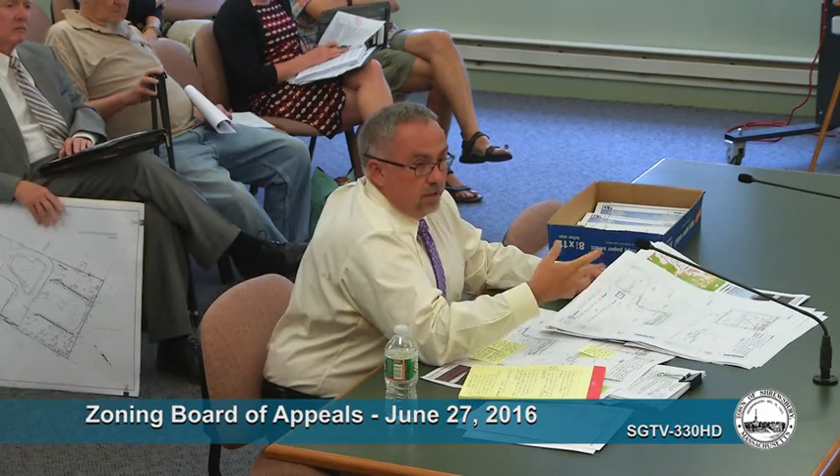So what I have done, okay with you, Mr. Chairman, I have taken out what I think are the most important documents from our application. I have pieced those together in a couple of handouts here that I can go through in 10 minutes or less, with a nice overview of the proposal. So if I may approach and distribute.

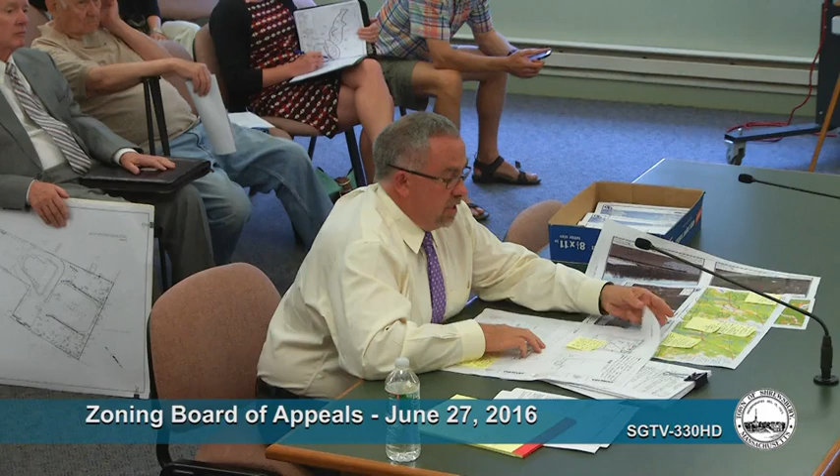You mentioned something about propane tanks? Yes, the proposed emergency backup generator would be run on an LP tank. Is there any way that could be put in the fenced-in area? It is inside, in the fenced-in area, yes. Just for safety reasons? Yep, it's in the fenced-in area, and I believe they drew the 10-foot spark radius around there for us. So, agreed.

I think an earlier set of plans may have shown that outside, and we added it to the inside. If I remember, the last time we heard this was the AT&T tower, and you co-located on that. And you'll be coming off of that? No, and I apologize if that was confusing — AT&T is currently located on top of one of those large electrical stanchion poles. I'm not here representing AT&T, but it's my understanding what they have there is a limited installation. Verizon Wireless would only be able to do a limited installation there as well, and it would not be able to provide the upgrade to 4G LTE services. So you're not on that tower now? No, we are not.

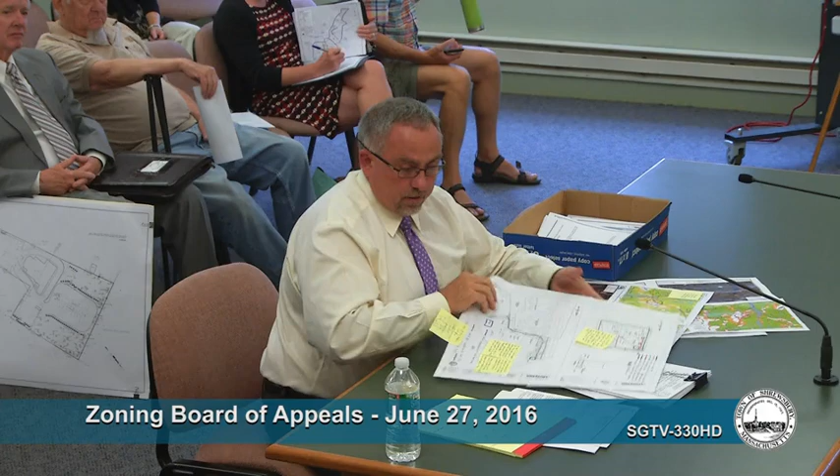How does this benefit the town of Shrewsbury, and do we derive any income from it? First, I would say it does benefit the town of Shrewsbury. As part of the RF report, it talks specifically about the number of vehicles that pass between exit 22 and Gulf Street, which is the most recent data. The most recent data from 2014 was just about 70,000 vehicles. On Main Street alone, the most recent data available, from 2001, shows about 12,000 vehicles a day.

So I think, first and foremost, the benefit is that we've identified a gap in coverage — I've passed back and forth in both directions on 290 with my Verizon Wireless phone, and it drops right when you get to those electric lines. So this benefits reliable service for residents, businesses, and public safety folks. And certainly I believe there's going to be an increase in real estate taxes that someone will pay, which would be a financial benefit to the town. So you'll be paying that? Correct. St. John's won't pay it. Correct.

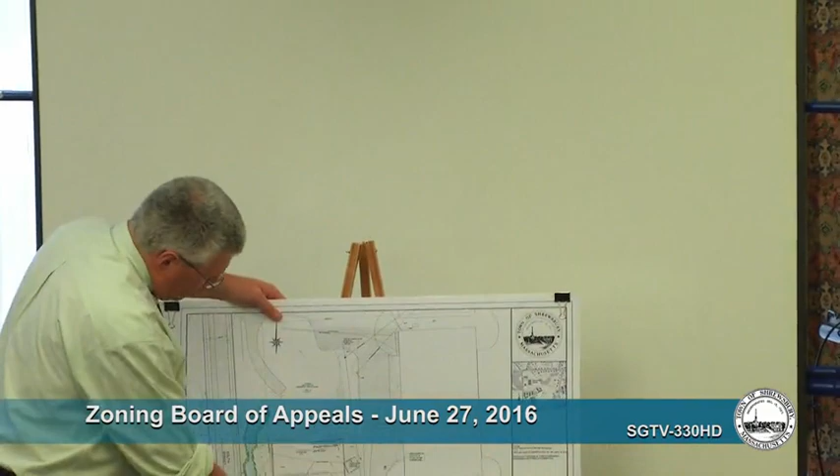The location of this proposed salt shed, shown in red, is at the existing DPW yard on South Street. The existing salt shed sits here. The proposed salt shed will sit on the existing paved area to the north of the existing salt shed, and the existing salt shed would then be torn down. We're trying to work it so that, depending on timing of construction, we can tear down the old one and build the new one in its place.

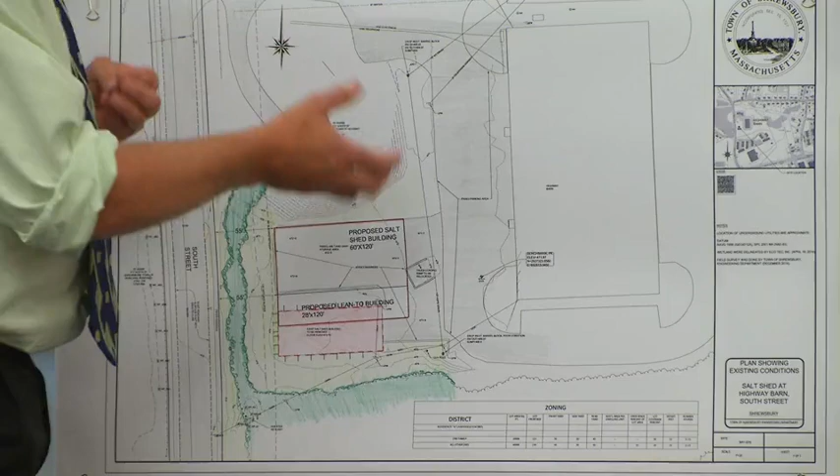If not, we'll have to build the main portion of the salt shed and then put in the overhang after the other salt shed is down. We're trying to get it constructed prior to shipment around November 1st. The shed itself will sit exactly the same distance back from South Street as it does now, except it will be further to the north.

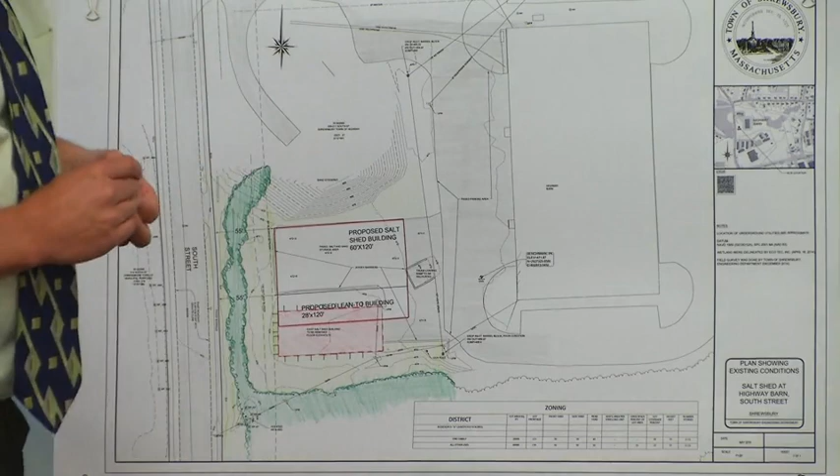Any questions? No, I'm fine with it. Does this mean that we'll actually get the salt shed? And a second part of that question, how long have we been talking about making this happen?

Oh, it's been over 10 years, I think, since we originally talked about this. If we're in place to do it, we're waiting to see what the final numbers come in. But I believe it's going to happen, because I think Dan and myself both want to get it done. So we're close now. We're close.

We actually have an architect we are working with at this point. We've got an appropriation at town meeting to study the facility, to look at the old and the new. And I know we have probably $500,000 to $600,000 set aside in Chapter 90 to fund the project.

I don't have any other questions. Good. Anyone in attendance wish to be heard on this? There being no further questions or comments, we'll take it under advisement. You'll be notified of our decision. Thank you very much.

Next is to hear the appeal of Bay State All-Star Cheer and Dance LLC, 228 Cherry Street, Shrewsbury, Mass, for a use variance to the Town of Shrewsbury zoning bylaw under Section 6, Table 1, to operate a cheer and dance place of assembly in the Limited Industrial District upon property located at 545 Hartford Turnpike. The subject premise is on the Shrewsbury Assessor's Tax Sheet 48, Plot 32.

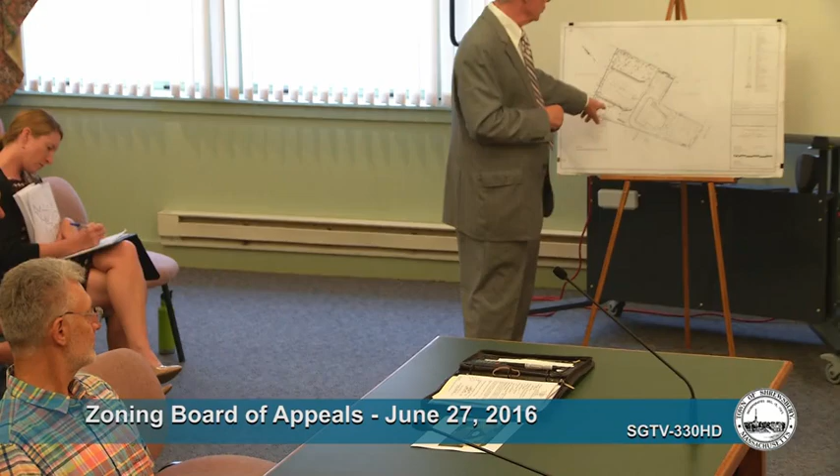Mr. Hakeem has decided, as you know, there was a bank here twice in this facility. Since the bank moved out, the unit has been vacant. His concept is for shared office space, as you can see from the signage. This lot is a fairly sizable lot in the center of Shrewsbury, somewhat of a pork chop lot.

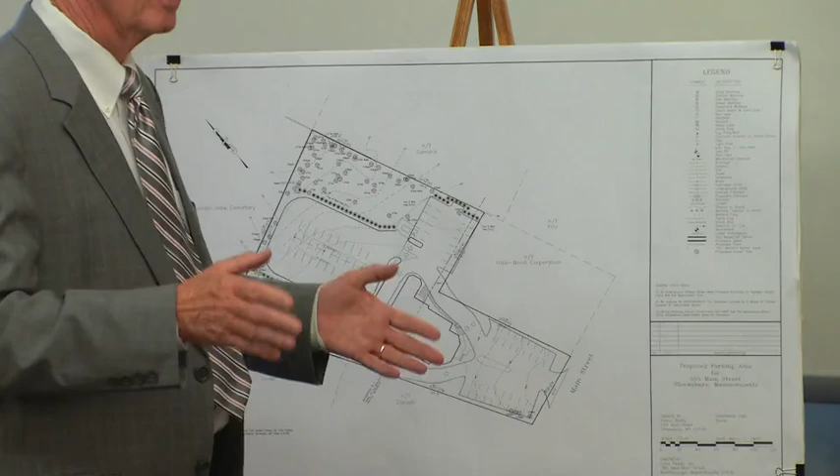It only has 83.04 feet of frontage. Because it is a sizable lot, if it were a rectangle lot, it would be allowed 223 feet of signage. But because of the amount of frontage on the lot itself, it is only specifically allowed under the bylaw 83 square feet of signage. That causes the hardship we're dealing with. The present signage at the property exceeds that amount.

This is why we're asking for the special permits, in order to allow the alteration of the signage that's there. In addition to the alteration, we are also looking for alteration of the roof sign to go from the rectangle presently, which is 24 square feet, up to 32 feet by use of an oval sign.

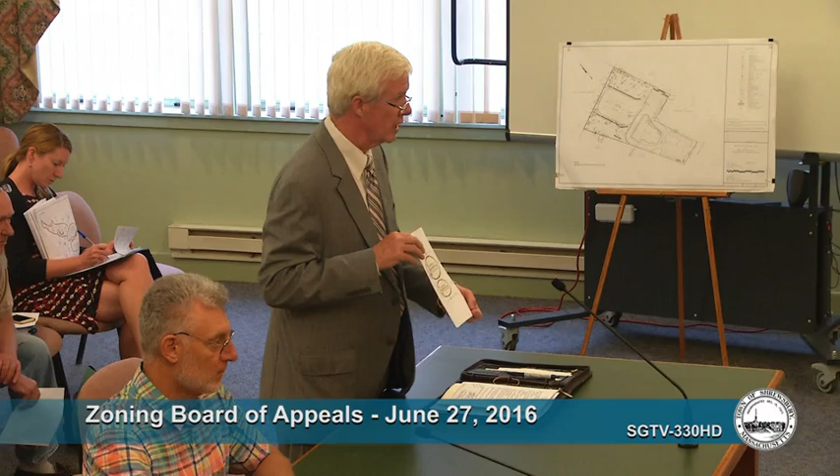If you look at page 2 of the handout I've given you, you'll see that if we stayed with the 24-foot rectangular configuration, that sign would be substantially smaller than what we believe is necessary in order to be read from the parking lot and as you enter the parking lot from the street. So that's the reason for that increase.

I've worked with the building inspector to figure out that square footage. I'm not a math major, so we came up with the fact that this request is for a 32 square foot sign based on the oval.

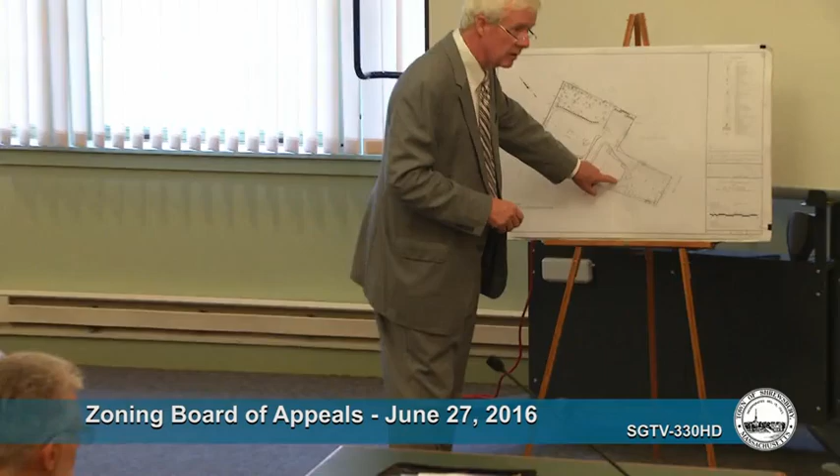In addition, because of the shared office space concept, we're looking to be able to put the names of specific tenants on the awnings themselves, on just the lip of the awnings. That comprises totally 28 square feet. Those awnings would be on the front and side portions of the front unit of the building, which is the unit we're talking about for this concept of shared office space.

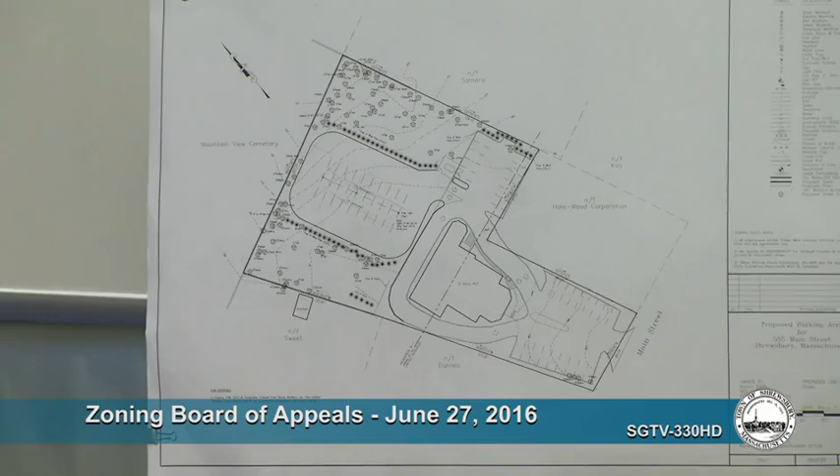So the total square footage we would be looking for is basically about a 32-foot increase overall on this property. The total square footage would be 130 square feet of signage, and that's for all the signs, including the street sign that's out there, the awning signs, and the oval roof sign.

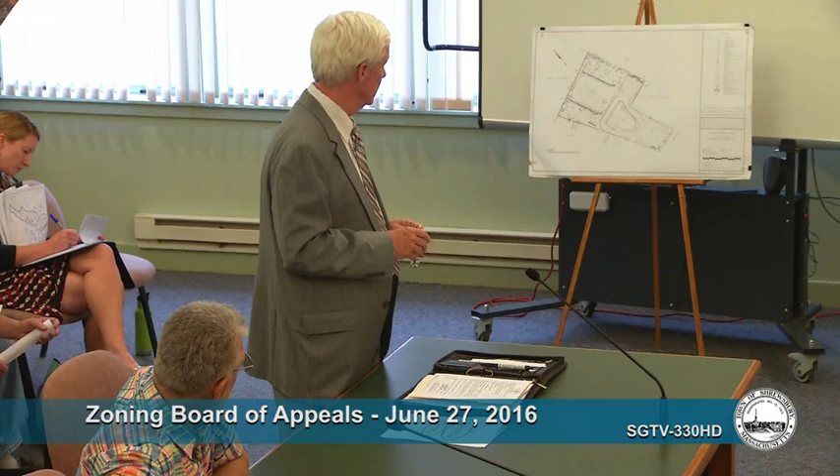As I suggested, respectfully, the shape of the lot poses the hardship we're dealing with. This request, I would suggest, is in keeping with the bylaw. This is a business in the center of town. I think the signage in these renderings is attractive.

It's in keeping with a good quality product and a good quality building that the Hakeems have owned for a long time. Jeff is a native of Shrewsbury, and the Hakeems have owned property in the center of Shrewsbury for a long, long time, his mother before him. This building has been a good, solid building anchoring the center of town for quite some time, having had a couple of banks in it. That's not in the market right now, so basically this is an attempt to make this a useful and appropriately usable building again.

With respect to this request, I would suggest that what we're looking at is a hardship incidental only to this particular lot. This is a unique lot in the center of town, being a pork chop lot the way it is. You've got the old Hales Drug, which is Rite Aid, right in front of it. I'm dating myself, I know, Dale.

Basically, it is incidental to this particular lot. I would suggest also, respectfully, that there is to be no harm. This doesn't derogate from the bylaw. This is a business use, a business zone. These businesses need signage. This is not going to generate any harm or nuisance in any way, shape, or fashion. It's in keeping with the center of town properties. So with that, if you have any questions, we'd be happy to answer.

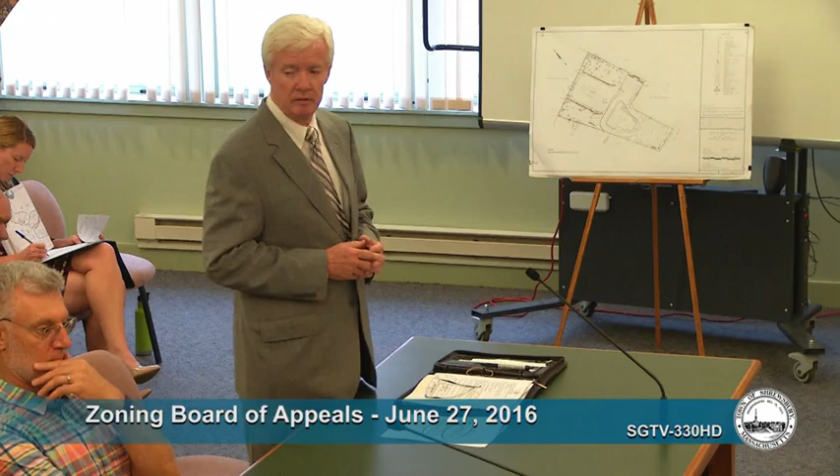Richard, did you abandon the sign at the rear entrance of that building? Yes. There's an awning there which represents the entry to the office lobby. Talking about this sign? Oh yes, that's abandoned. We chose not to do that. That is not part of this. I apologize, that shouldn't have been on there.

And the one on the front roof, is that going to be lit? Yes, I think so. There have been lights there presently, so that would be expected. Are they internal or are they spots? Exterior spots, shining at the sign.

All right, and the awning signs with the names of the businesses, are they going to be easily removed, so if some other tenant comes in that part can be changed? That's the idea—to design it either as a kind of placard, a horizontal panel constructed of canvas, the same material as the awning. You can just remove that panel and put the new tenant's name on there as tenants change hands. And will there be any lighting on any of those?

No. However, the site, as you know, is lit, in accordance with previous requirements.

Lisa: the businesses that have to do with medical offices that are still on your street sign—yes, they're still there—do they have any signage on the building itself? No. Do they have signage on the door entries or anything? Yes, they do, but no awnings. No. Okay, and one last question.

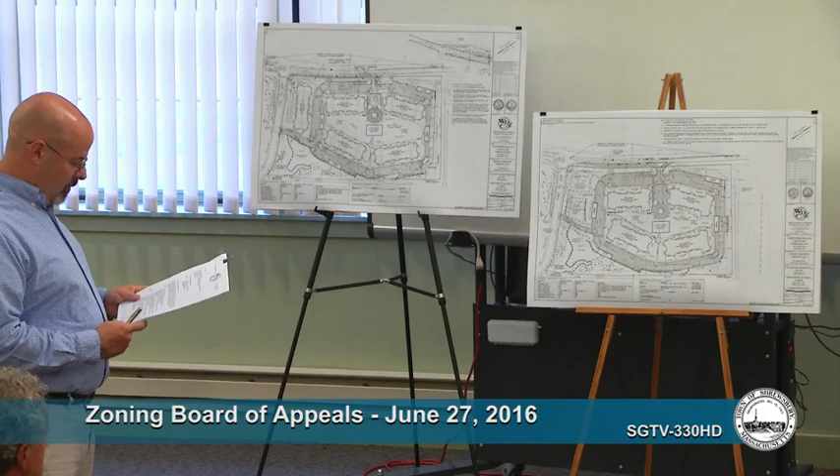We have also introduced seat walls within the site along the back sides of these buildings. They're 22 inches high, and that's at the toe slope of the common area, which allows pedestrians in the development to have a seat as they work their way through the site.

The parking density on site was increased to accommodate additional visitor parking. What we've done on this site as well as Phase 2 is increase it by 10%. Again, the majority of that is located in this area, having heard the concerns with proximity to the property line. Unlike the previous plans, we've decreased the density from 180 units in 5 buildings to 158 units in 4 buildings, creating a bit more green space between the paved surfaces and Stony Hill Road.

We had provided snow storage areas throughout the site. Those are pretty much along the site access drives and back parking areas as well. Typically, towns require 5-10%. This particular site, we're provided 16% of snow storage.

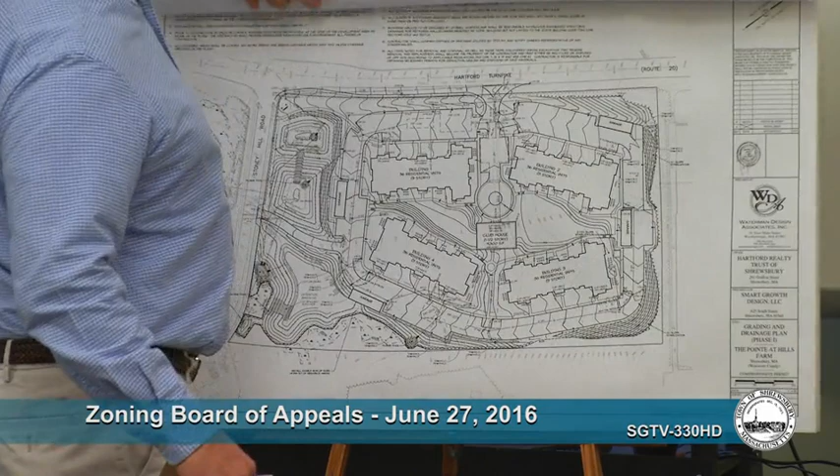Obviously, we regraded the site to accommodate the new improvements. As we were working our way through the site, pulling everything in tighter away from the property lines, it limited the ability to site infiltration basins in these areas that we had previously sited, so we needed to accommodate those increases in stormwater runoff.

To do that, we've gone to an open drainage system here. You folks may recall at a previous hearing I talked about taking Route 20 stormwater runoff and dedicating an area to address that. We want to keep those impoundment areas separate from one another for maintenance purposes. So basically, we've taken the Route 20 runoff that comes down here, routed through this area, which eventually comes down through the site to a plunge pool at this location.

Localized runoff collected on site is captured in infiltration basins in the site access driveways and within this basin. That basin, when it discharges, goes down to the plunge pool before making its way, both systems eventually making their way down through the wetland into a storm drain drop inlet we're proposing here, discharging onto the property at number 424.

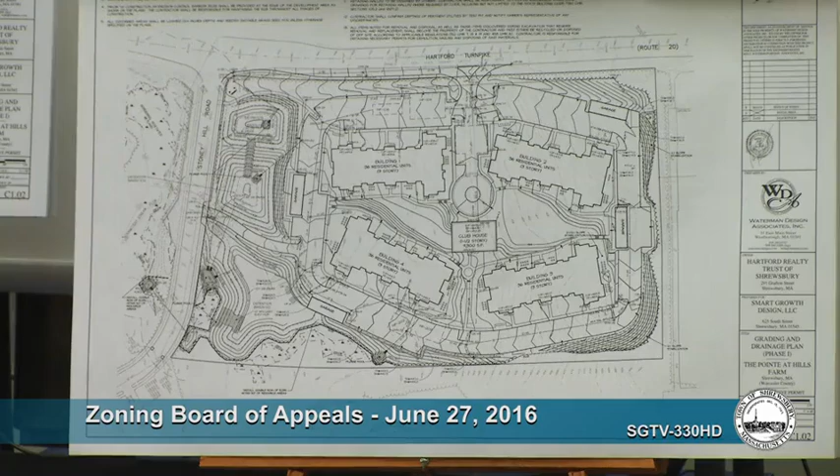The grading scheme on those plans, by the way, is pretty similar to that of the original submittal.

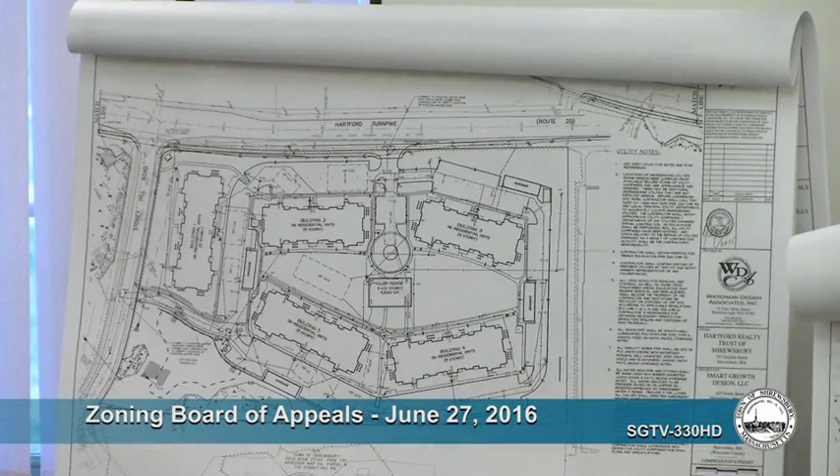Not much to talk about here with respect to the utilities. I think the big thing was the Fire Chief had asked that we provide a hydrant in this area, so we proposed one up here. The other thing he suggested was that we take our water system and loop it in this area. Meeting with town staff, your town engineer suggested that rather than take our water system and loop it, coming out into Stony Hill Road up to this location and looping it through Stony Hill Road, we just keep it within the site and conduct it right here. What that does is it doesn't disrupt the vehicle maneuvers out on Stony Hill Road.

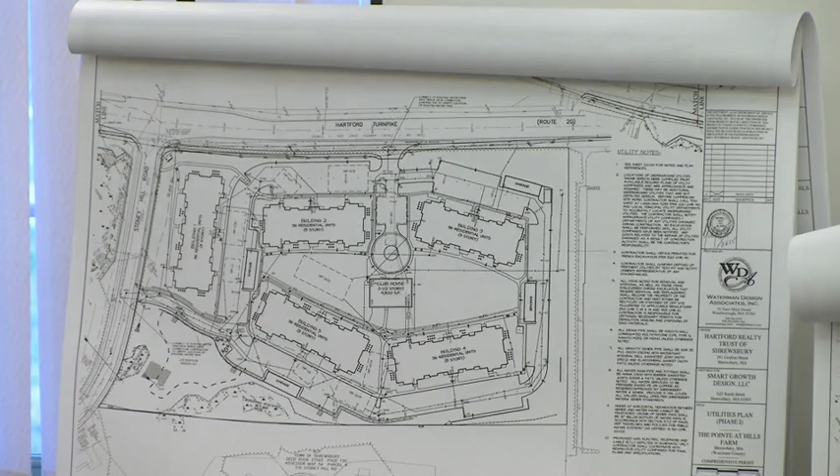That was basically it for that phase.

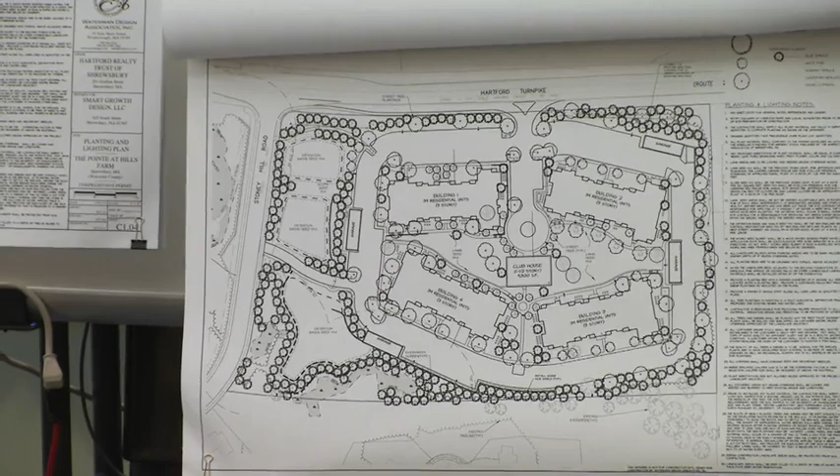Landscaping, and I think this is where we're going to see the biggest difference from the previous plan to the current plan. So what we have done is, note the darker, heaviest circles here, those represent evergreen trees. Those are your blue spruces, your white pines, your hemlocks, your Norway spruces. The other trees are your Zelkovas and little leaf lindens within the site. But what you'll notice between the two plans, first, with the building here on the November plans, we sited landscaping along this area. All you had, in this case, along here, was a single buffer line.

What you're going to get along here, these are pretty much at grade, so these trees will be planted probably about 2 feet or so higher than the back of sidewalk elevation. You'll come into the site, there's going to be a little berm, then it drops down into the detention basin. This is important because it creates a topographic barrier which allows the trees to gain a little height in this area. So as you drive into the site, if we just positioned a single row here, you'd get a visual barrier to the buildings eventually when these mature, but right here you have an instant barrier—because at the back of sidewalk, at planting, if they're 15 feet high and you're sitting in your car 3.5 feet off the ground, you look to the right and you're seeing greenery.

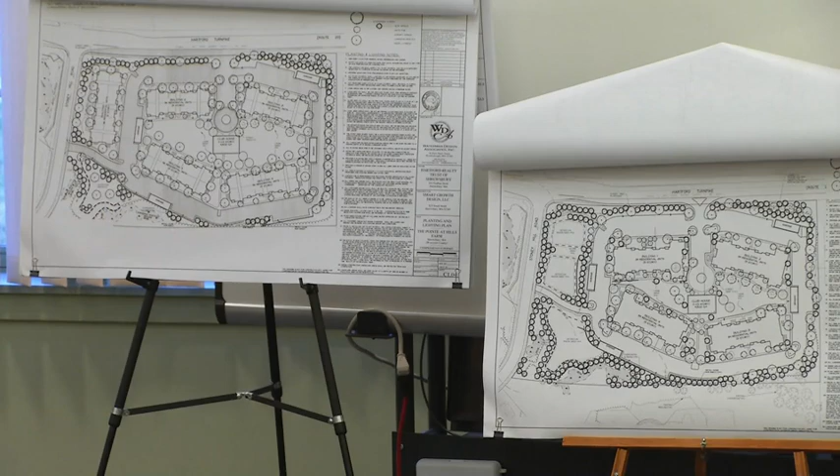Those are very mature evergreens, so what we're looking to do is complement those by beefing up the evergreen barrier in this location. Again, where it was fairly open with deciduous, we're going to beef up that border. Same thing with the basin, backside of the basin - now we're proposing evergreens to shore up that screening.

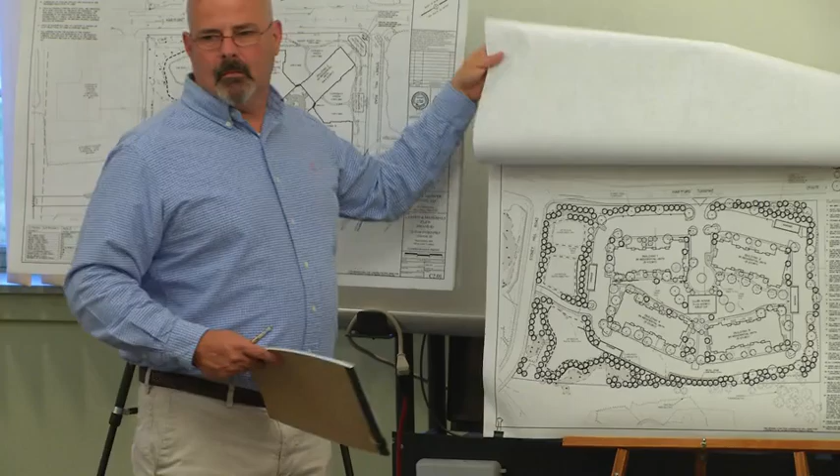That's pretty much it for phase 1. I'd like to flip to phase 2. Sorry for taking so long.

Phase 2 - the comments between phase 1 and phase 2 are pretty much the same. We did eliminate the waivers, if you recall. This was in the 50-foot setback, complied with the underlying district but not the overlay district - sorry, complied with the overlay district but not the underlying district. So we pulled this building back, reconfigured it, and in doing so, we also eliminated the fourth story.

Vehicle maneuvers, again, purely from Route 20. Like phase 1, there's an emergency vehicle access in this location with a tubular steel swing gate up here. One of the comments from Graves Engineering was that they were concerned about the longitudinal slope of this driveway.

We did a couple things here. To get the slope to work and be a little more gentle in this area, even though it is an emergency vehicle access, we eliminated a few spaces and relocated them to the parking area, which caused us to add a few spaces within the inside bays of the parking area. But that made for additional space here, which you'll see on the landscape plans we were able to vegetate with evergreens.

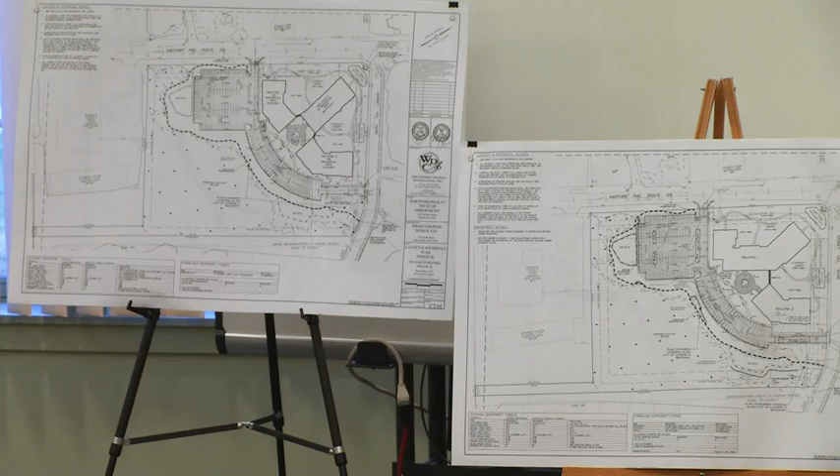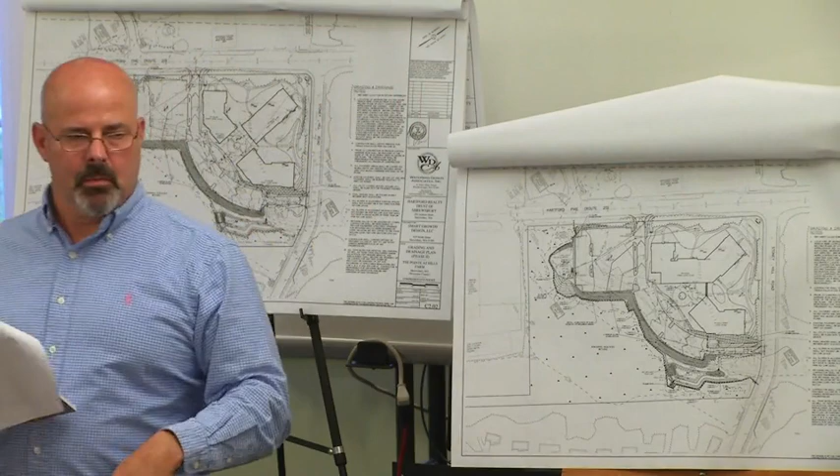Like with phase one, we provided on the plans detention basin access drives. Where we access these drives on both sites, they're fairly flat in topography. We work our way around the berm, which is about 10 foot wide. The travel path is about 8 to 10 foot wide, which is ideal for a backhoe to support the access of the drainage apparatus.

So again, we regraded the site to accommodate the new improvements. Not much has changed in terms of the grading from here to here, with the exception of those improvements associated with the 2 building configuration versus the 3. There was some minor regrading down here because we advanced the parking area to relocate the spaces that were over there.

One of the comments that Graves Engineering made on this particular basin was that we're proposing a vertical wall in that area. The reason we're doing that - we could have graded the wall and graded the area out, but in doing so we would come really close to or impact the wetlands. So instead, what we've proposed is a vertical concrete wall, about 1.5 to 2 feet high, unlike the typical detention basin.

One of the concerns that Graves had made, and we're all over it as soon as they brought it up, was that if a critter gets in this basin, how is it to get out? So what we propose in this area is a critter ramp, so that as they work their way around, they find the ramp and work their way out.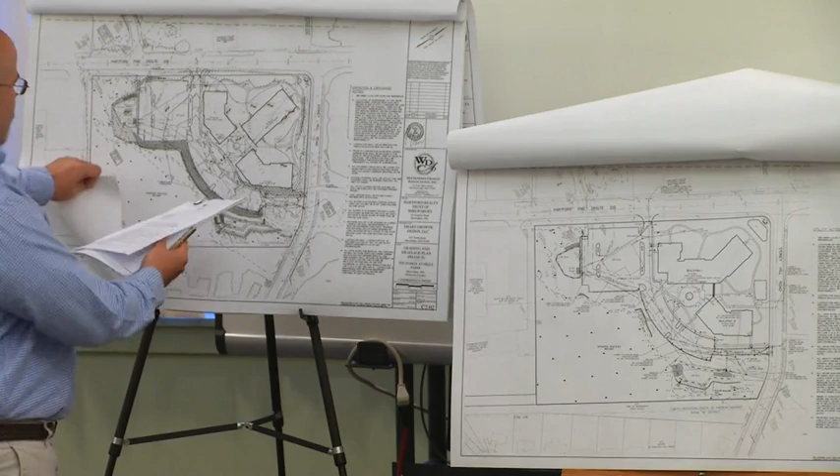The existing sewer easement comes through here - actually, comes through here, here, and out through here. The original sewer is currently located under our riprap. It's going to be from the roadway grade about 20 feet down from the riprap, from the finished grade. Because of that, that particular sewer, that leg of sewer, is private sewer. It does come under Route 20.

Liberty Church - that sewer infrastructure, as I said, on this plan was coming through here, down here, and out. What we have done is we've realigned the sewer. At this point here, we've picked up the sewer, rerouted it, and kept it within the driveway. And then we took it back into here and rerouted it back into Stony Hill Road.

So in terms of utilities, along with water, the fire chief had asked that we provide a fire hydrant here. We only had one here originally, but now we have one on either end to serve each building independently.

Let's see, transformer pad - one of the other comments that Graves Engineering had was in this area here. Now, transformer pads, when you see the old ones, they're about that big. Well, now with the new requirements, you have to build a landing strip to install these things. So now we've taken that transformer pad, and because of the impact on the slope and the vegetation there, we have moved it up into the site so it doesn't come into this flat area up in here.

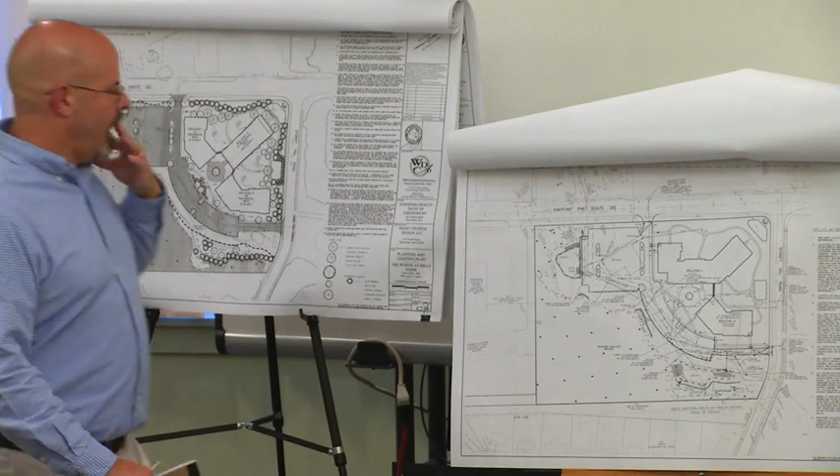So again, like the previous phase, we concentrated the evergreens to the perimeter of the site, moving more of the deciduous to the inside of the site.

So as you can see, I went out along this road yesterday morning. If anyone heard Morning with the Beatles on ZLX, it was me going through there. It was low, but I was still driving through, listening to them.

In this area here, I looked up through here, and as you can see by this symbol, it is primarily deciduous. Seeing that, note the single row of evergreens in here. What we had done is beefed that up pretty good. So again, this stays deciduous, obviously, but we have beefed up the evergreens.

Note in topography, it does come up a little bit. We beefed it up in this area here. Again, as part of our realignment of the site, eliminating the parking spaces, we were able to enhance that vegetation in that location.

We've done the same thing here. As you see on this plan, it didn't really offer much in terms of vegetation, but we've done that here for those residents located here, looking up through the buildings. That is pretty much it for both phases.

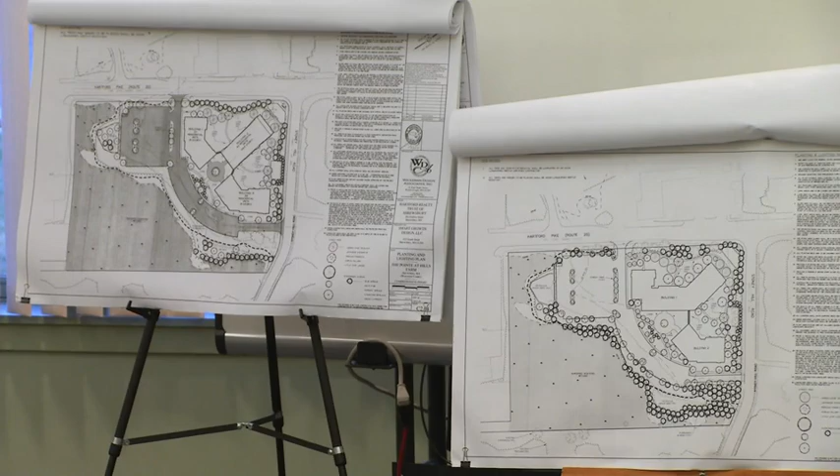Okay, Mr. Hill? I have actually some questions on the phase one plan, right? Wayne, can I? Turn them around. Yep, you wish I had PowerPoint, don't you?

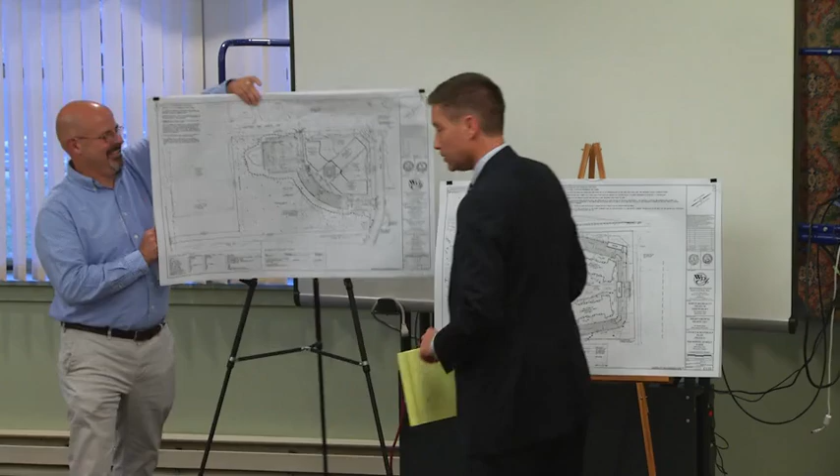So I might have missed this point, but on the old plan, you had a building in this location, and you were infiltrating. On this plan, you've got basically two basins here where the building is. Why do you need two more basins with a project that has less impervious area? Are you doing less infiltration?

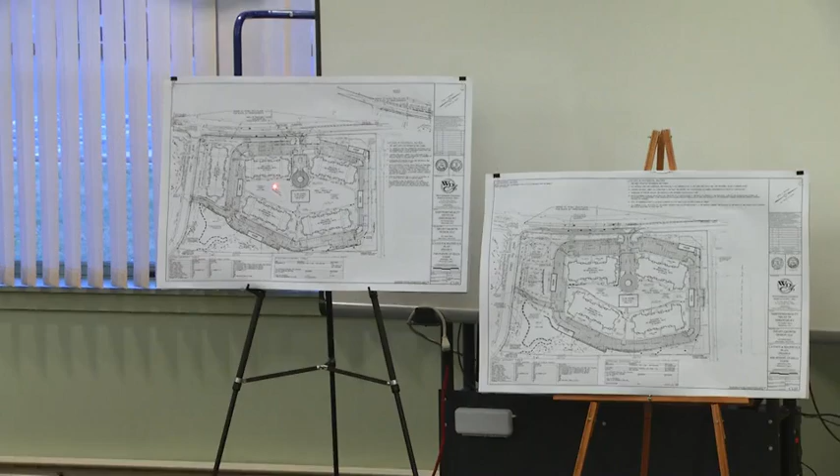No. So, Mr. Chairman, as I indicated earlier, what happened between the two designs, you can see in this one here, there's quite a gap between the buildings. The buildings, in order to meet the setback requirements, and now because of the configuration of the buildings, Cube 3, in eliminating that building, had put a little dogleg on these buildings back in here. So to maintain separation between the buildings without cramping it too tight, we sited them in those locations.

Unfortunately, what that resulted in was no ability to site infiltration systems in these areas. So in order to attenuate those flows and infiltrate, we needed to relocate them over here. Again, what we wanted to do, and MassDOT's on board with it, is keep the stormwater system separate. So it made perfect sense to create an easement up here for the benefit of MassDOT in their system. The easement would run down to here, and this particular system would be specific to this Phase 1 development.

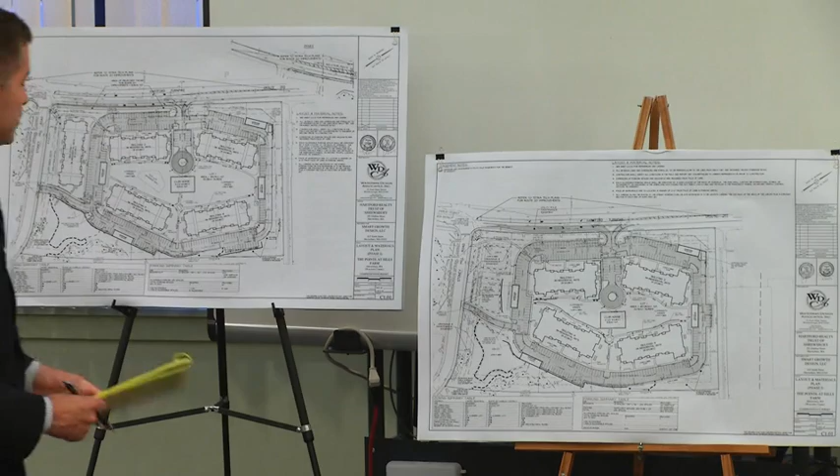All right, well, I guess more of a comment than a question. I think it's a shame that we're not infiltrating in here. I'm not sure I understand why this design was necessary against this design for setbacks. Now they have basically all this area which could have been used for other purposes, perhaps as parking, and they want to move this back. The fundamental goal, I think, from my client's perspective, is keeping this project as far away as possible so that you have a transition from the high-density uses here to the very low-density uses in the neighborhood, which is really all this area back here.

It was our hope that with the shrinking of the density of this project we'd be able to push this back towards Route 20. Instead, we've got twice as much drainage basins as we had before. I think there should be a creative opportunity here to think about how to infiltrate this water throughout the site rather than dumping it all in a concentrated area, which really is the antithesis of low-impact development. Low-impact development under today's principles would have you infiltrate your stormwater all over the place with Cultec units, and perhaps infiltration in Cultec units within the parking areas.

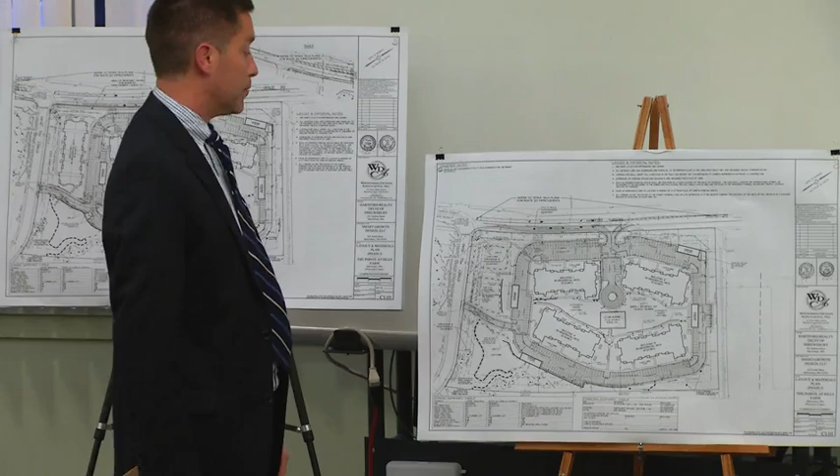Maybe Wayne's thought about that and it's not feasible, but it seems what we'd like to see is this moved back further. I have proposed a 50-foot vegetative buffer, which would be more consistent with this kind of transition theory that DHCD wants to see with respect to moving high density to medium density to low density, and having at least some kind of buffer here and getting this driveway and buildings pushed back further.

If I could, Mr. Chairman, could I just respond to that? As Mr. Hill had indicated, yes, we did think about that. And again, there are a number of criteria when siting these systems. One of the criteria is groundwater.

So we need to maintain, in order to have an infiltration system, a 2 foot offset to groundwater. By the time you put in these systems, it basically comes down to volume. So the smaller the horizontal footprint, the deeper the vertical footprint. Because the horizontal footprint has shrunk in this area, and we were limited by groundwater, it caused the system to go up.

Now, because the system goes up, and there's a grade differential from this side of the site to this side, a natural gradation across the site which flows down to the existing area, it would have caused breakout along this side slope in here. So we really couldn't look at that.

So what we had done is, again, looking at this area as green space. Ideally, I am on public record as stating that what I wanted to do, and feel free to look at the recording, is there's a swale over in this area that all I wanted to do is just create a berm across it and keep the vegetation. Unfortunately, because of the volume of runoff that gets down to that area off of Route 20, I wasn't able to do that. So what I've done is, like I said, in the landscaping plan, that whole area is going to be green, vegetated down low and up above.

With respect to Mr. Hill's comments about parking, and siting parking in this area, I suppose we could do that. But again, what that does is eliminate some of that green space, and it causes the residents of these 2 buildings, rather than accessing their buildings from these parking spaces, to be forced to park in this area and work their way up through the site to their units. So it didn't really make sense, though I do appreciate the suggestion.

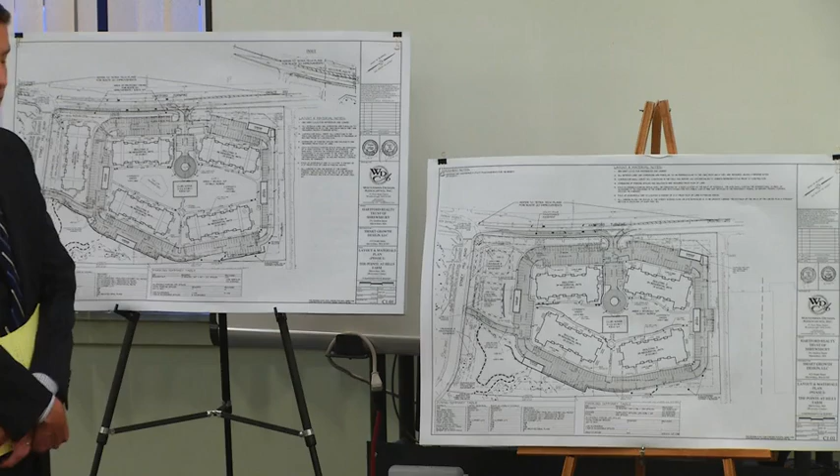Well, just in rebuttal, I think you might lose green space here, but you're going to gain it back here. And balancing the equities here, I think it's more fair to the neighbors to have more green space here, where they're getting a project that doesn't comply with zoning.

Excuse me, Mr. Chairman, just one more point. I will note that off in this area, at the pinch point, you'll notice that's a 24 foot wide minimum width of an access drive. We needed to create that because, especially since we no longer have free access and egress out to Stony Hill Road, it's critical now that we maintain a circular loop throughout the site. So that 24 foot pinch point right there, we need to maintain that. That in part also dictates what's happening here.

As I said, based on one of Lisa's comments, this particular plan, which shows a very tight and sharp angle to the property line, I've been able to soften that. And again, I do appreciate Mr. Hill's comments in providing additional buffer along the property line. I think we're fairly effective with that by eliminating or relocating these parking spaces off to this area.

Can I ask, why is it necessary to handle or manage stormwater runoff from Route 20 on this site? Is there some obligation that this project has to handle Route 20 runoff? Unfortunately, with many properties throughout the Commonwealth, and I'm sure throughout many other states, they handle their state's runoff from state roads. In this particular case, state runoff was coming in from the state road, and yes, we needed to attenuate that because we're making improvements out here as part of our widening for the deceleration lane to access the site.

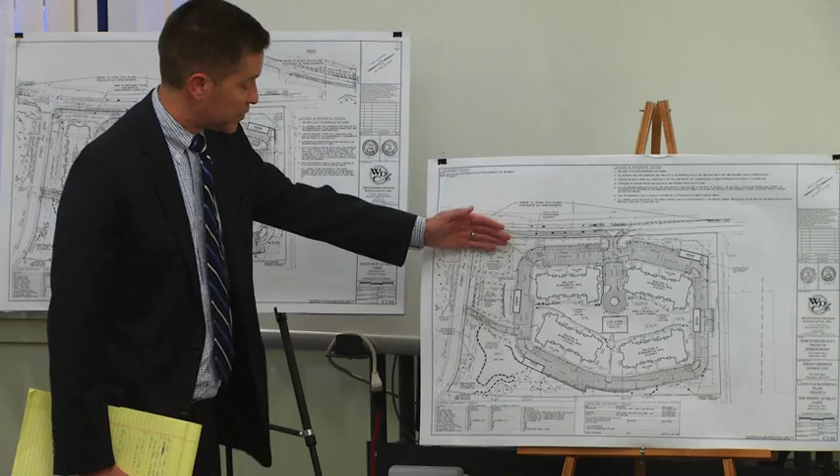Another stormwater question we had was, what's being proposed is eventually all of this runoff from here and here is going to go through a culvert underneath Stony Hill and end up basically in this area, where they have a drainage easement to a 7,000 square foot area. Has there been any peer review of the capacity of this site to handle this additional runoff, hydraulic-wise?

Again, the site plans of the revised design were just received this afternoon. It will go out for peer review. Because that area is a wetland resource area, that's more applicable for the Conservation Commission review than the Zoning Board of Appeals review. Except that we have a stormwater bylaw, which this board is stepping into the shoes of.

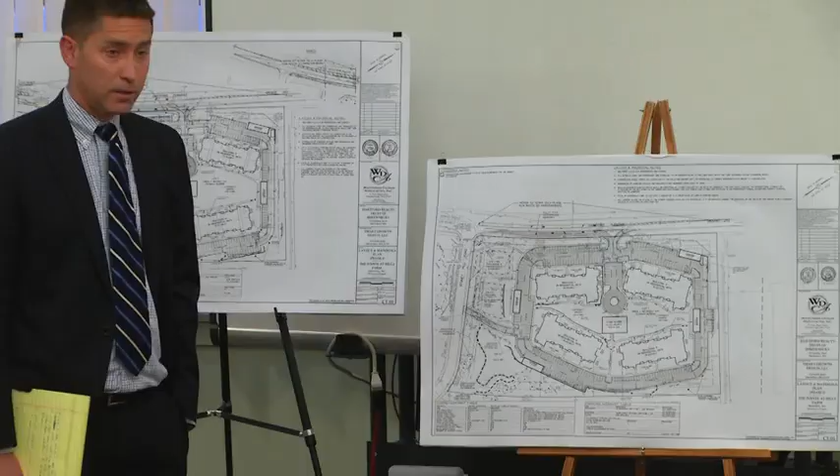No, we don't. There's no stormwater regulation. The bylaw? The town engineer can answer that question, he's in attendance. We do not have stormwater regulations. We do have a stormwater bylaw without a regulation. Right, but you have a bylaw, and this board steps into the shoes of the... No, because the bylaw is associated with any property with MS4, which this does not. Okay, all right.

In any event, I think this should be evaluated as part of this process and not just passing the buck to the Concom. And it sounds like that's going to happen anyway.

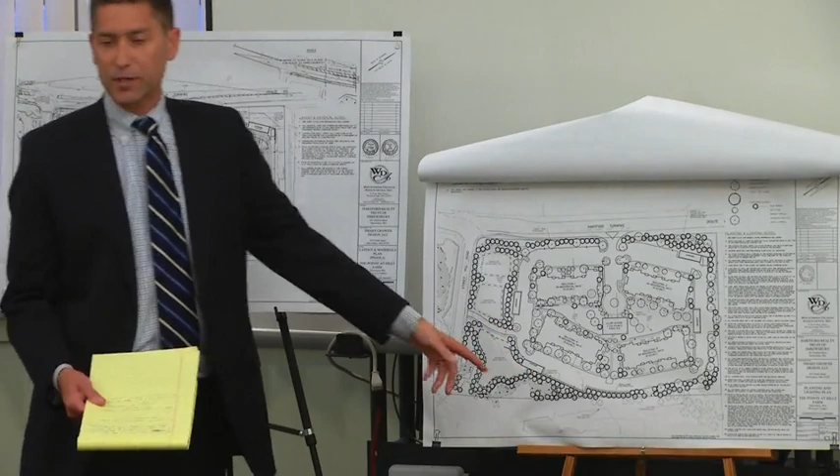With respect to the trees that you showed on the landscaping plan, the last sheet, Dan? Yeah. Are these circles showing the diameter? Is that the canopy of the tree, or what does that represent? That represents... so I guess in terms of the evergreen, it would be to the drip edge. And is that a mature tree after like 20 years, or is that as installed? That's interesting you ask, because if you look at the diameter of those trees...

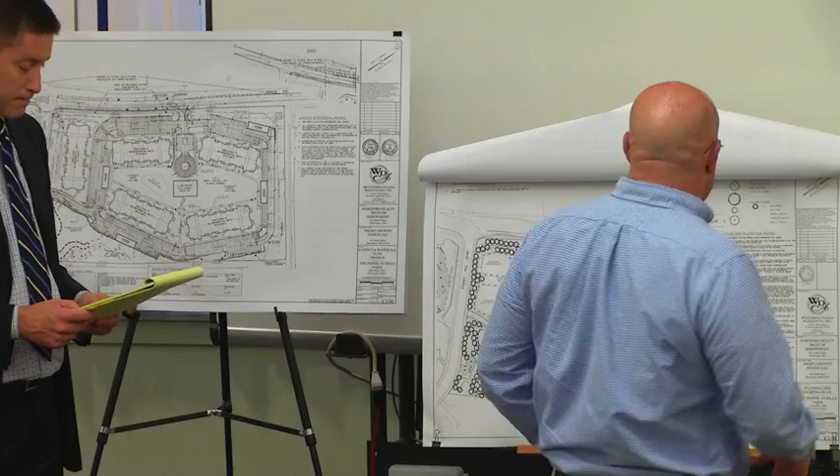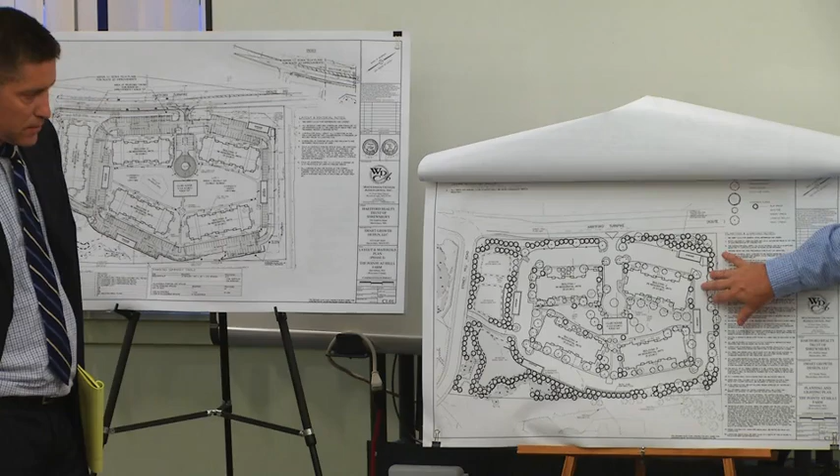As we know, your blue spruces and those varieties tend to get to like 50, 60 feet tall. Likewise, their base tends to have a spread that's pretty significant, 30 feet. So as I looked at this, and I failed to ask the landscape architect in the office, if you look at the scale of this plan at 40 feet, that's telling me the spread on the base is 20 feet. To answer your question, I think this is a representation that we're looking to enhance the vegetation. The actual spread width you may be seeing is something that's about two-thirds the spread width on the tree. So this is showing about a 20-foot spread width, and that's not something you're going to get when you plant it. So that's as it grows. That's correct, I'm sure that's correct.

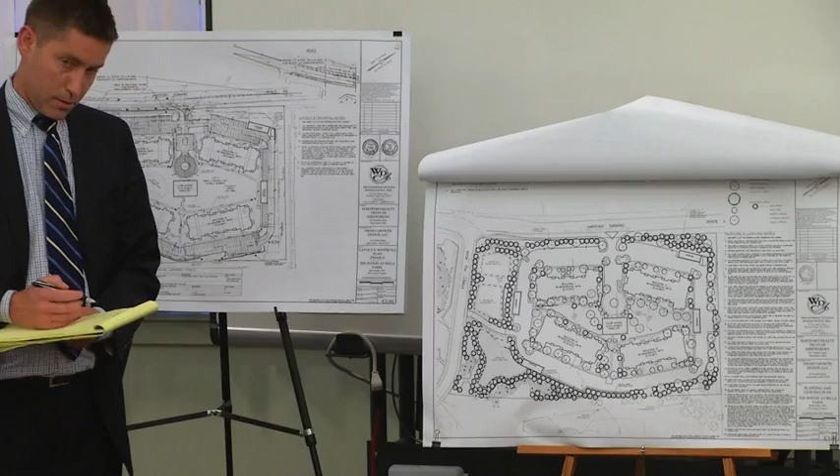Wayne mentioned the wetland delineation on phase 2 had expired. Do you have a new ORAD for that, or are you going to get one? That's a good question, Dan. So what we're going to do, Mr. Chairman, is as part of our NOI filing, which is going in this week, we're going to request that the commission review the wetland delineation as well. And phase 1, is that delineation already approved under a separate ORAD? Yes. And that hasn't expired? That's correct. That was just issued last year, by the end of last summer I think.

Okay, thank you. Anybody else wish to be heard on design? State your name for the record.

Scott Payne. So, if I understand the proposals on both sites now, we're getting retention basins to collect all this stormwater runoff. How do those not turn into mosquito magnets? Mosquitoes are bad enough in Massachusetts as it is, but are we going to end up with these standing pools of water that are just basically a breeding ground for mosquitoes? How does that work? I'm glad you asked that question, Mr. Payne.

Under the state stormwater regulations, they're only allowed to hold water up to 72 hours. So the way these things work is during the least frequent modeled event, which would be the 100-year storm event, it surcharges and peaks at about 12 hours, and it's a 24-hour duration. It peaks at about 12 and a half hours, then recedes. In the stormwater report, you will see a drawdown calculation for each of these basins, showing that it does meet that criteria, that it recedes within 72 hours.

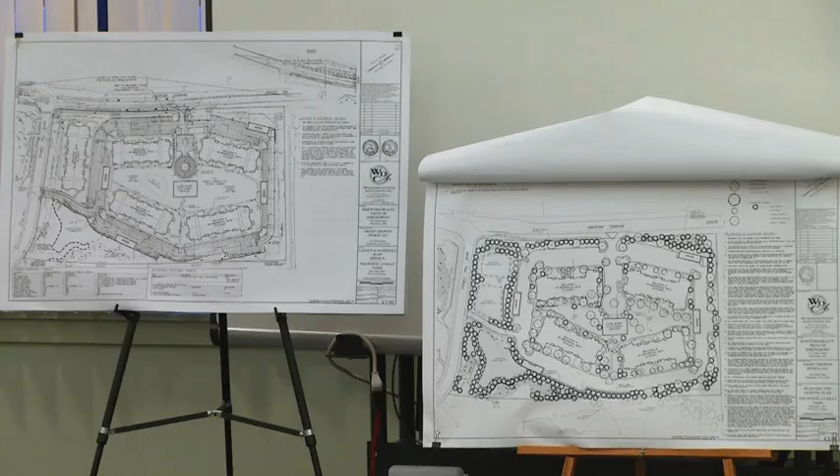Thank you. And then just a follow-up question about the trees and the like. If I heard him right, at the back of the project there's going to be an 8 to 10 foot tall retaining wall, and then you're planting these trees on top, with 40-foot tall buildings. I can appreciate the comment — if you're in a car right up beside it, at such a steep angle you'll be hard pressed to see over the trees.

But I'd like to point out that most of our neighborhood, in fact the entire neighborhood, is set back and below that, so the sight angle isn't quite so steep. You're going to be looking at a very gentle sight angle, at which point these 50-odd foot tall tops of the buildings are still likely going to tower over the trees. It's going to become the only view from most of our neighborhood if you look north.

And again, it all gets back to the density and the size. His explanation for why they can't move further off the property lines and allow for more vegetation and a better sight line and everything — it all comes back to the density.

You have to consider the house right next door, absolutely. Those poor folks are going to have this within feet, tens of feet, a hundred feet of them, whatever it is — it's not very far. But everybody else in the neighborhood, that's going to become their view. They're going to look north and see this towering above, because as you back further away, you get a better sight angle of everything. And there's—